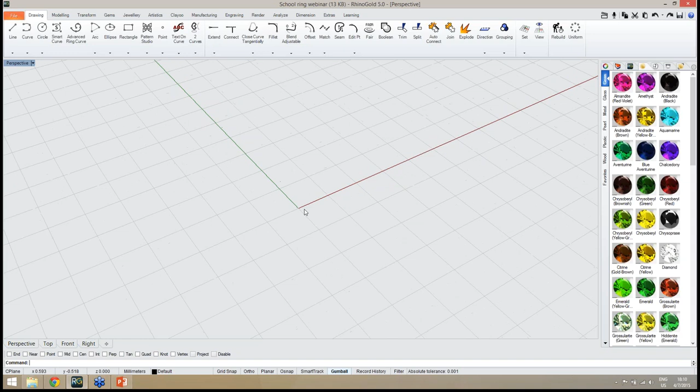The first step, as always, I recommend to start with either the ring size or the central gem. In this case, I'm going to start with the central gem. So let's go to the Gems tab, and then with the Gem Studio tool, we can define the main gem. In this case, we will use a Cushion Gem Cut. As you can see, under Gem Studio, we can easily select the gem cut we want to use.

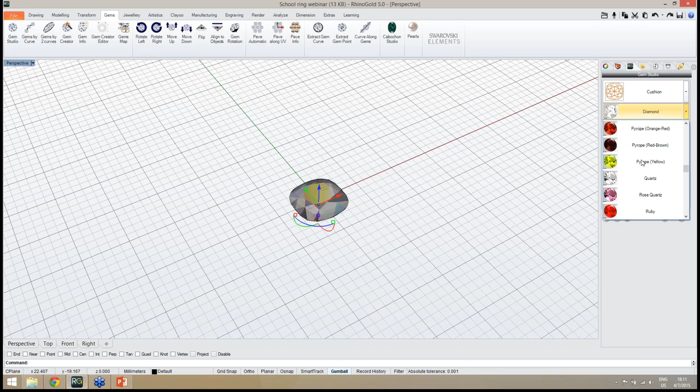And then, of course, we must select the gem, so Cushion. And then we just need to define the size. So let's do it with 6 millimeters. And then the material, of course, in this case, well, I can change for any other material. Let's use Ruby and click OK to add the gem to the document. So the first step, the gem, is done.

Now, the next step, I'm going to define the ring size and the ring parameters. So I'm going to use, under the Jewelry tab, the Signet-Ring Tool. The idea is to define with the signet ring the shape we want to create, and of course the ring size, in this case, let's use size number 18, and then adjust all the parameters.

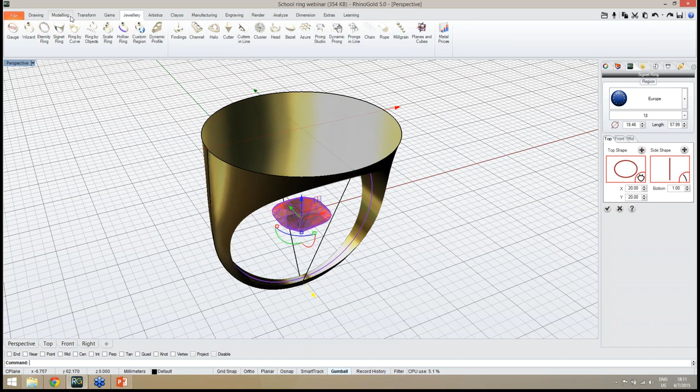So instead of using a round shape in the top, I want to use a shape like the Cushion Gem Cut. So what I'm going to do is to get, under the Gems tab, the Extract Gem Curve tool. This tool will allow me to extract the profile curve from this gem. Now I want to use this curve as my top shape for the signet ring, so I just click Add and define the name. I can define Cushion Curve.

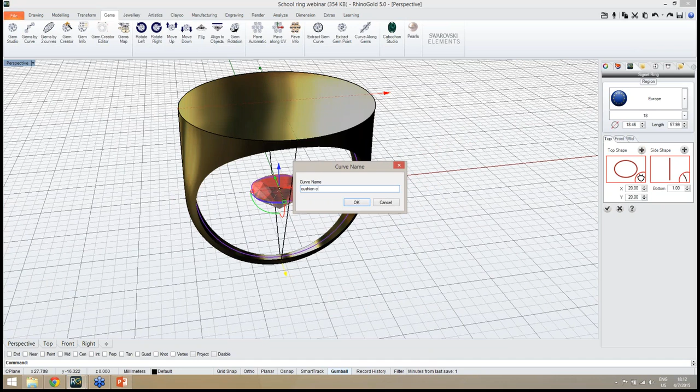And as you can see, automatically it will adapt the ring size, so in this case the ring top shape, to the curve we defined. So the next step now is to define all the parameters.

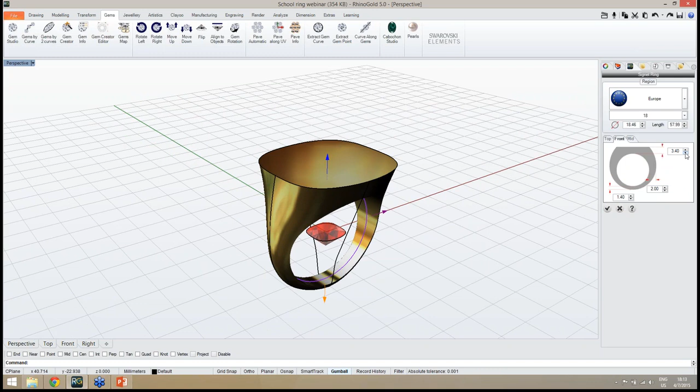So I'm going to define the bottom with 8 millimeters. I'm going to define the front total with 4 millimeters. I'm using the parameters in the side panel. I can also define the side with 2 millimeters, and of course the bottom, let's use 1.4, looks good. In the top, maybe a little bit less, 3 millimeters, I believe it's enough, 3.2.

And of course, in the top view, we have the option to define the side shape. So instead of the straight line, I'm going to use profile number 5. As you can see, it will adjust the ring shape with this side curve. So this is the idea, we have the ring defined. I just need to click OK to add the ring to the document. So this will be the base I'm going to use to define my ring.

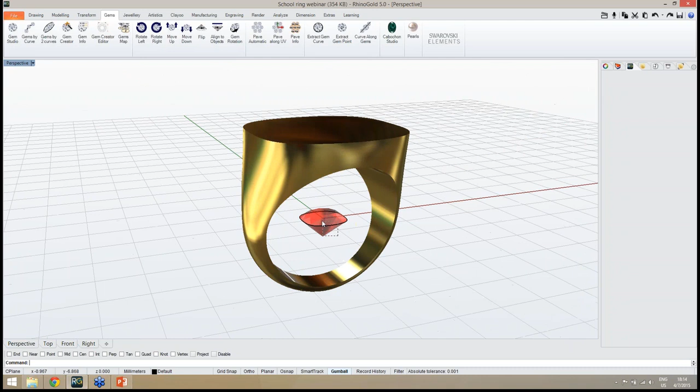And now the next step, I'm going to move the gem to the top of the ring. So I select the gem and the curve, and in the front view, using the gumball, I'm going to use the grid snap option. So I just use the gumball to move the gem exactly where I need, defined exactly in here.

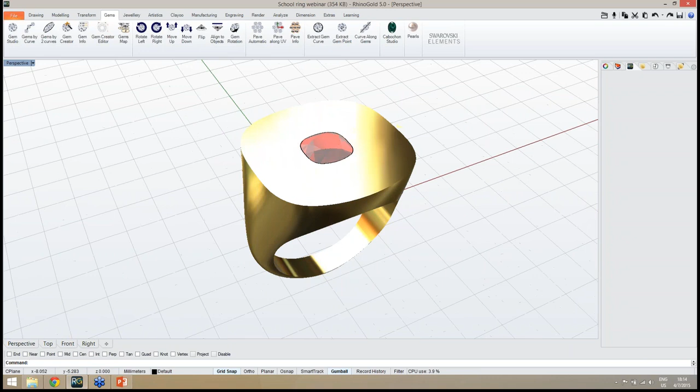And now back to the perspective. What I'm going to do is first remove the top surface, this flat surface in the top, and change it for a different shape. So under the modeling tab, under the cap submenu, we have the Extract Surface tool. The idea is we select this tool, extract surface.

We need to select the surface to extract and make sure you are using copy no, so I don't want to copy, I want to really extract this one. So I select the surface, I press enter, and now I can delete directly with the keyboard to delete my surface. As you can see, now my ring surface is open. What I need now is to create another surface.

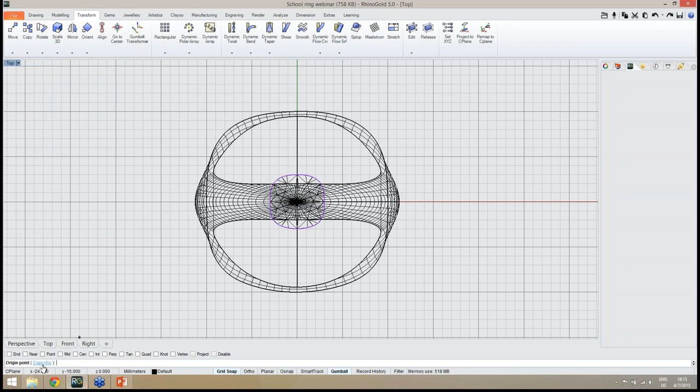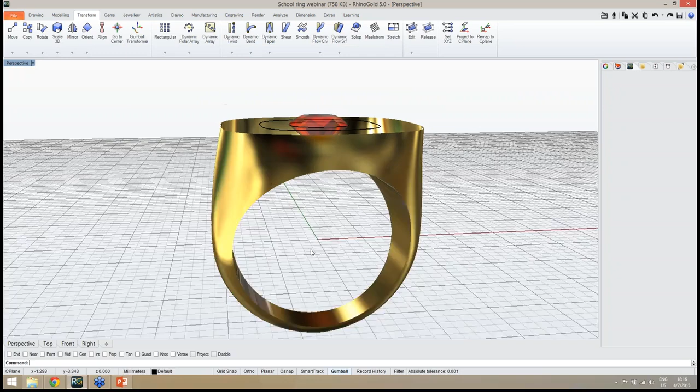But before, in the top view, I'm going to select this curve and create a curve between these two. The idea is using the Transform tool, under the Transform tab, I'm going to use Scale 2D, so scale to direction, and make sure in the command line we are using copy option yes. So I start from the center and create a curve, probably without grid snap, just in the middle, so it will be here. Looks good, enter. So now in the perspective we have another curve, and I'm going to move this curve.

So let's go to the front view. I'm going to move this curve to the same height as the top gem surface. So now the idea, I can see in the perspective, if I need to scale a little bit, I can scale easily with the gumball, just a small detail. And now I want to create a surface using this curve.

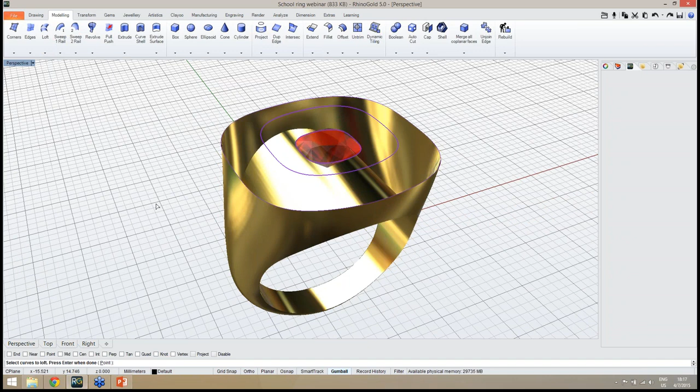So the idea is under the modeling tab with the Loft Surface tool, I select the curves to loft. The first one is the edge, the second one is this curve, and the third one is the curve around the gem. So I select these three curves, I press enter, and as you can see I have here the direction of the curves and the starting point. I press enter again, and I have this surface.

Remember, by default it can be normal, so it will be a round surface, but we can easily define straight sections and preview. So this is the shape I'm looking for. After this I click OK to add this surface, and next I'm going to hide the gem.

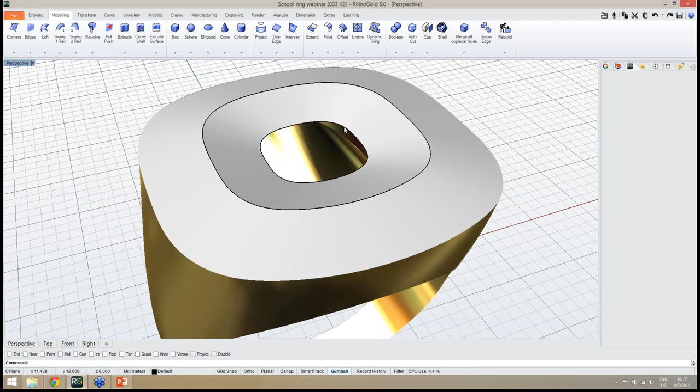To show what I'm going to do: select the gem, hide it - remember press shift to show this viewport toolbar. Now I want to use this curve to create a planar surface. Under the edge submenu we have planar surface, and with the curve selected I create my surface.

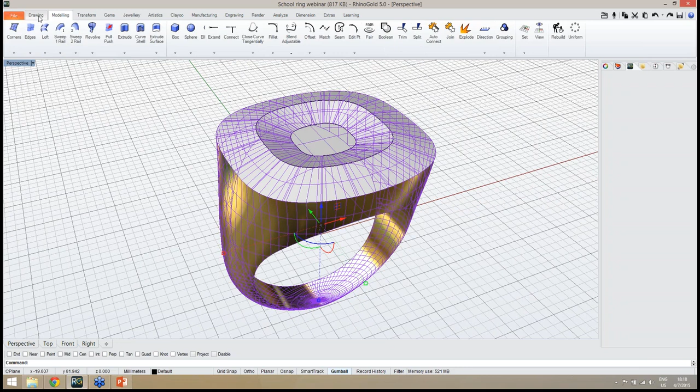So what I need now is to join all this surface in a single closed solid. I select this one, this one, this one, and under the drawing tab with the join tool join all these in a closed poly surface. As you can see in the side panel, we have this as a closed solid.

So the next step, I will start defining in the right view the model, in this case the curves I want to use in this side part of the ring. Let's use the Smart Curve tool under the Drawing tab, and I'm going to use the option Symmetry Vertical. I activate this option in the command line, and also I will say Closed Curve. So now I can define easily the curve I want to use.

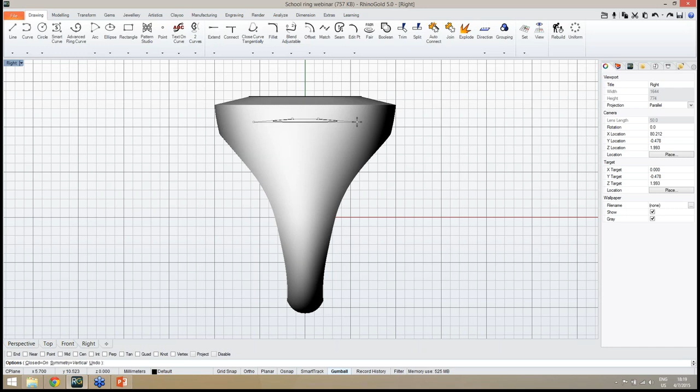So this will be the idea, the shape of the curve. Let me select the curve - as you can see, it's here. I can scale a little bit or adjust if I want, maybe in this direction, and it looks good already.

So I have this curve, and now I want also to put some letters inside this curve. The workflow will be: I'm defining this curve in the C-plane, and then I will project to the surface. So the idea is in the right view to define everything I will need.

Now I will use the text, and I will define first a text. I will define RhinoGold, and let me undo the size. So what I'm going to do is repeat this step: RhinoGold, and the size I will use - let's try 1.8.

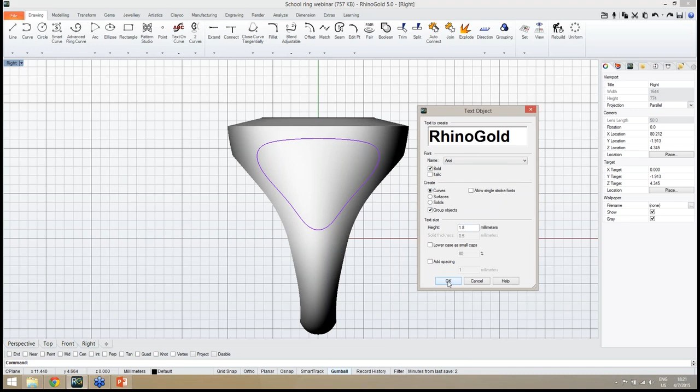Also make sure in these text options we can generate curves, we can generate surfaces, solids. So I'm going to group them, and I will use Arial Bold, 1.8 millimeters. When I click OK, I can define my text curves in here.

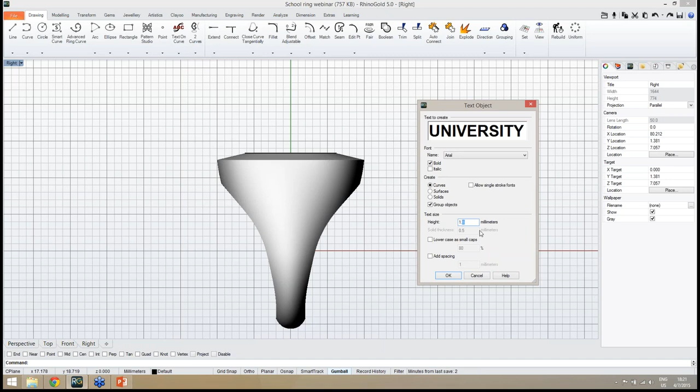Okay, and now the next one, I'm going to define another text. So now I will define university. Of course, you can customize this exactly as you need - this is just a sample of the workflow we recommend. You can use your own letters, so this is just to make sure it's possible to do anything.

So I'm going to place the letters under RhinoGold. Remember, any question, use the chat.

And finally, the last one, the text, I will define 3D. So in here, maybe 3 millimeters. Let's try - looks good. So I will place this in this part.

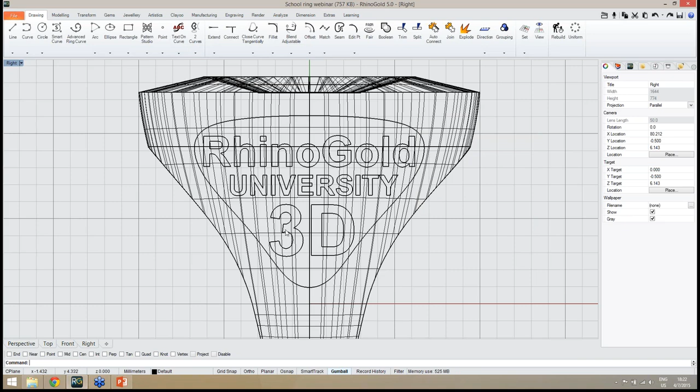Okay, perfect. So I have the side curves I want to use - these are the curves. And now I just need to project these curves to this surface.

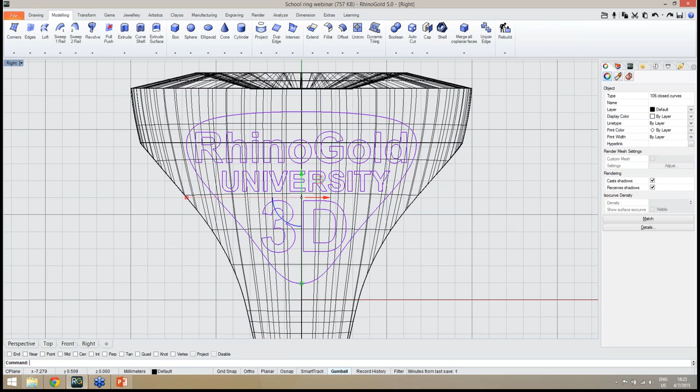So what I'm going to do is make sure I'm in the right view. Now under the modeling tab, we have the project tool. So under the project tool, we just click, and we need to select the curves, and then the surface to project - in this case, this outside surface. I press enter, and now let's take a look at the results.

It will project all the curves to the entire object, as you can see also in this inside surface. So now what I'm going to do is deselect the ones I want to keep, and then I will delete the ones I don't want.

So on this side I can't use it, it's the wrong direction, so I will only keep this side. Control to deselect these curves - remember, we can use Control but dragging a window is faster. And now I deselect the ones I want to keep. So from this side, everything is done.

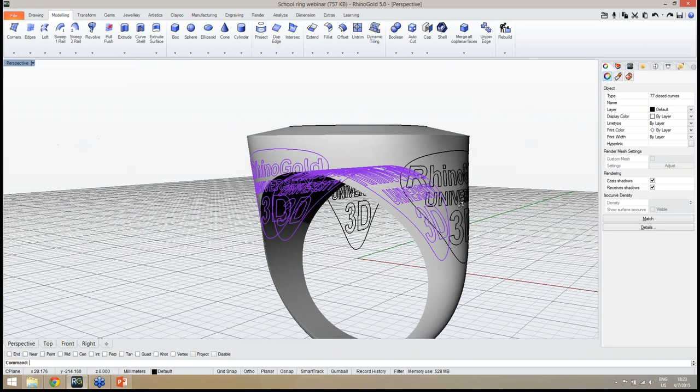And now with delete from the keyboard, I can delete the others I don't need. And I'm going to group these ones and change to a different layer. So I will call this layer curves, and I will change object layer - right click and choose the option change object layer. Then I just need to turn off this layer, and it will be hidden.

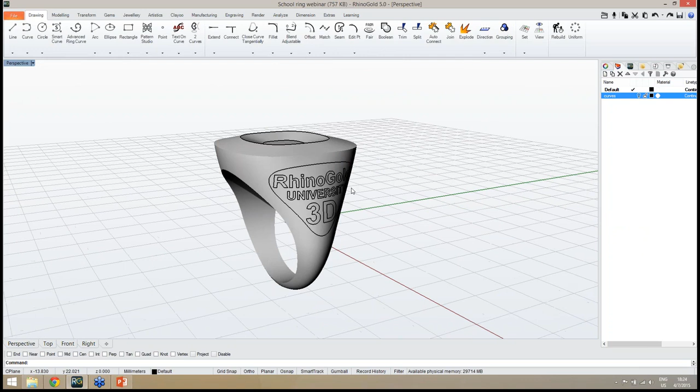So now I have these curves. Let me group them to make it easier for selection. I group these curves, and the next step I'm going to create - in this case what I'm going to explain, the process before, to understand the next step.

I'm going to create a surface from all these curves to then generate a solid from this surface and make the Boolean operation. So to make sure I'm using exactly the same surface, I'm going to the Modeling tab, and once again I'm going to use the tool Extract Surface.

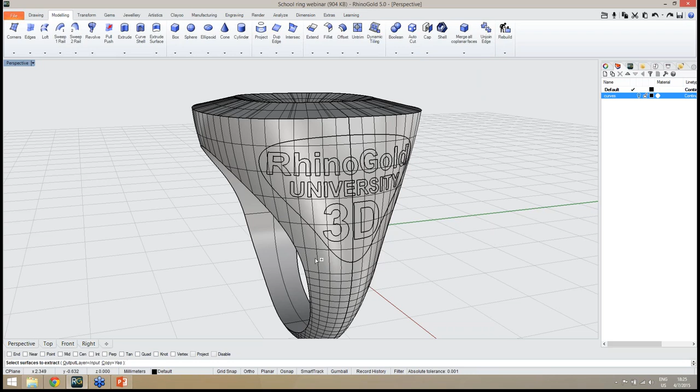Under the Cap submenu we have the Extract Surface tool, and here I will define the option under the command line, Copy Yes. I want to keep the ring exactly as it is, a closed solid, but I want to copy this outside surface. So I copy it, enter, and now I can select the ring and hide it. So I just have my curves and my surface.

Now the idea is to cut this surface using this curve. So under the Drawing tab, with the Trim tool, I first need to select the cutting object, so it will be all these curves except the surface, then I press enter and I need to define the objects to trim.

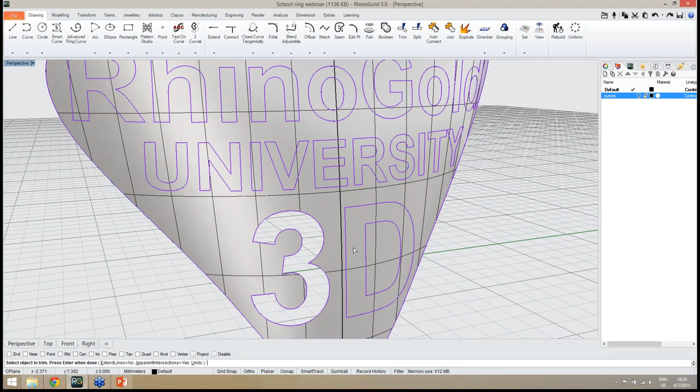So I will start with the outside surface, and then I will cut this part, this part, this part, each letter. Just click inside the part you want to cut. And as you can see, now I cut my letters.

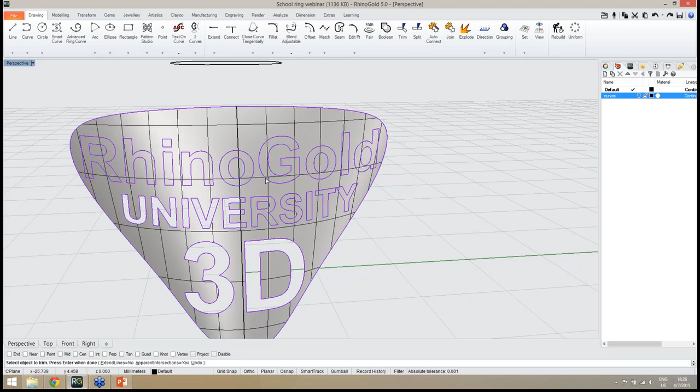This is important. As you can see here, this was the seam of the surface, meaning it was the beginning and the end of the surface. When we trim it, now we have two different surfaces. That's why we need to pay attention to make sure we cut all the parts.

So the same, I cut all the parts, all the letters. I just click inside, it's very easy. And after this, let's just finish almost the H and the R.

As you can see here, I need also to cut this part. So this is the idea. Everything looks good. I press enter in the end, and now I have my surface.

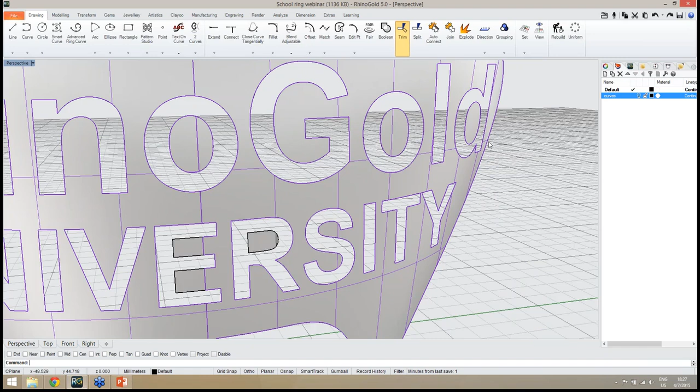Where I'm going to select all of them. As you can see, the inside parts from the letters now are a different surface. I need to select all.

First I will join, and then I will group. Join to make sure this part is joined with this and with this, but then group so each time I need to select, I just select this, don't need to select this part, or the inside the O or the D. So this is the idea, just to make the selection easier.

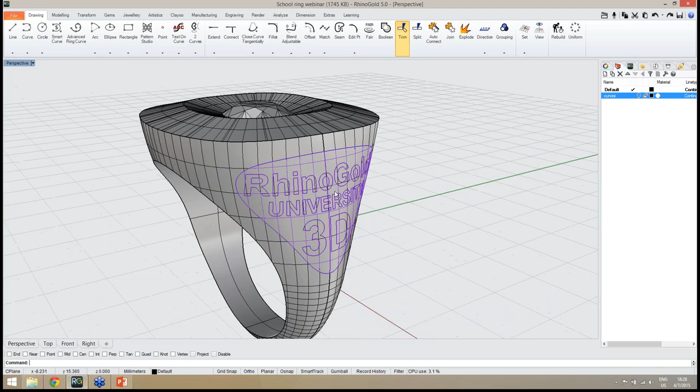Now, the next step, I'm going to show my ring again. I'm going to select the curves, in this case only these ones, and change object layer, so change object layer, and now I have this surface. To create a solid from this surface, and keep exactly the same orientation, the same reference, I'm going to the Modeling tab and use the Offset Surface tool.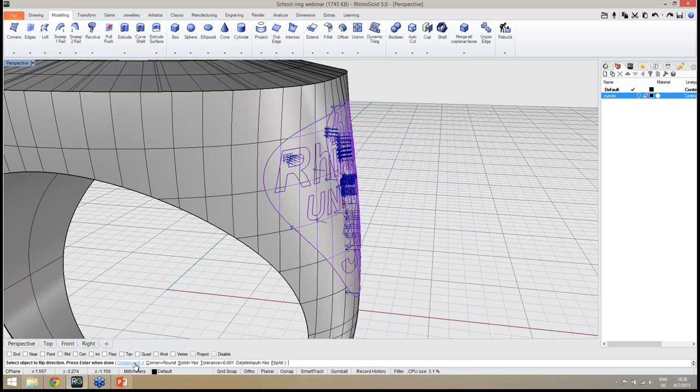So Offset under the Modelling tab, as you can see the direction is flipped. I want inside direction, I want to create a cutting object, so I will flip all and make sure this is what I need. I want to create offset distance with 0.4 millimeters and make sure I'm creating a solid. So solid yes, and press enter.

So now it's generating my solid. As you can see, I will hide this to show you, I will hide the ring. I've created this as a solid, so to be my cutting object. So this is the idea, I have my cutting object.

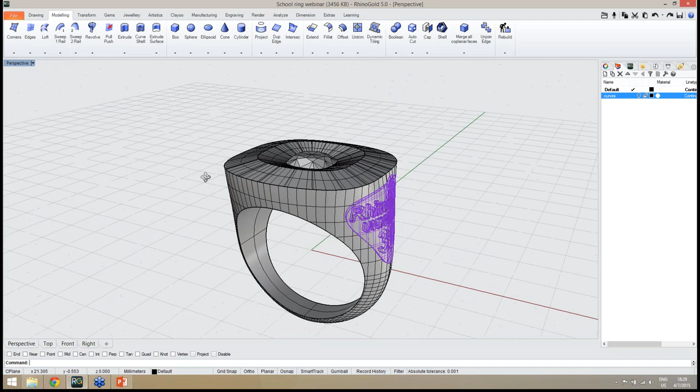What I'm going to do now is make the same object on the other side, but the workflow is the same. In case you want to apply different objects on both parts of the ring, it's exactly the same process. In this case, I'm just going to create the same.

Just one thing, if I create a mirror or a symmetry, it will reverse the direction of the letters. So with letters, it's not recommendable to do that. What I'm going to use is the rotate tool.

So the objects to rotate, it's my cutting object. Copy, I will say in the command line the option copy yes, and then I start rotating from the center, so grid snap on. I start rotating from here to here. So remember, copy option yes, and press enter.

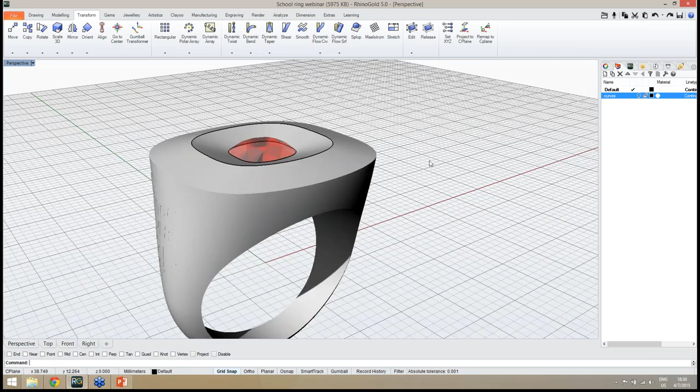So now we have the cutting object on both sides, and now I want to, let me change to render it, I want to hollow my ring. So this is a solid ring, I need to hollow it.

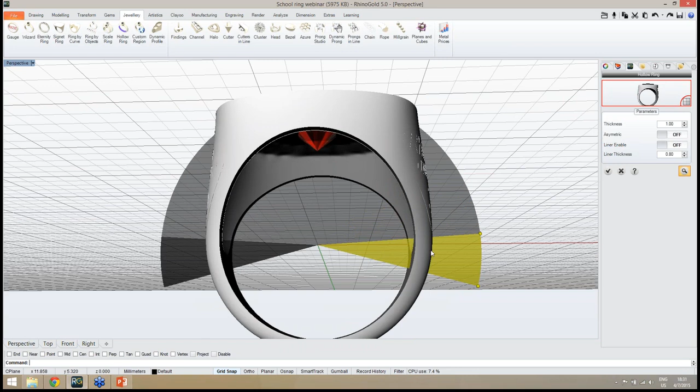So in the Jewellery tab, the hollow ring tool, I just need to select the surface to remove, so it will be the inside surface, press enter, and now I just need to define all the parameters. In this case, this is the main area, this central area, it's the area to hollow, then the transition area, and finally the solid part.

In the side panel, we can define the thickness. In this case, I want to use 1.2 millimeters, and I preview the results. So now we have 1.2 millimeters thickness, the ring is hollow.

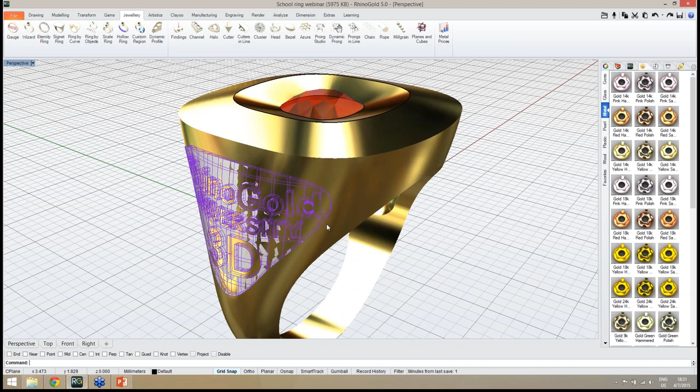I just check in here to add the changes. Let me define a material just to show. Now, as you can see, we have this cutting object sharing the same surface. Usually we call these coplanar surfaces, and as most of you probably know, Rhino has some difficulty with coplanar faces.

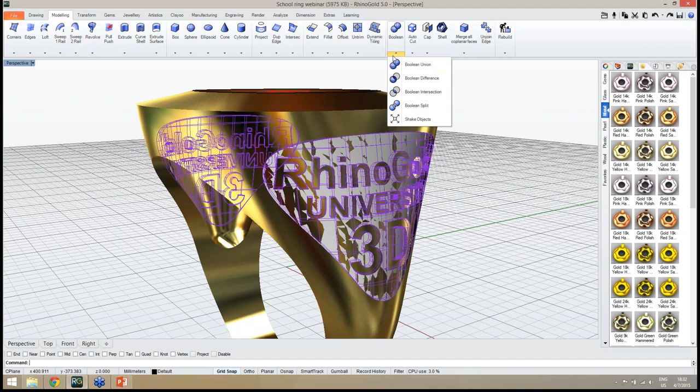So to make Boolean operations, we should avoid this. To avoid it, we can use, for instance, under the Modelling tab, the shake objects tool, or in this case, what I'm going to do is just enable the gumball, and using the gumball, I will scale a little bit, but just really a little bit. With grid snap activated it's not good, so I will undo and disable the grid snap, and now scale just a little bit to make sure it won't be a coplanar face.

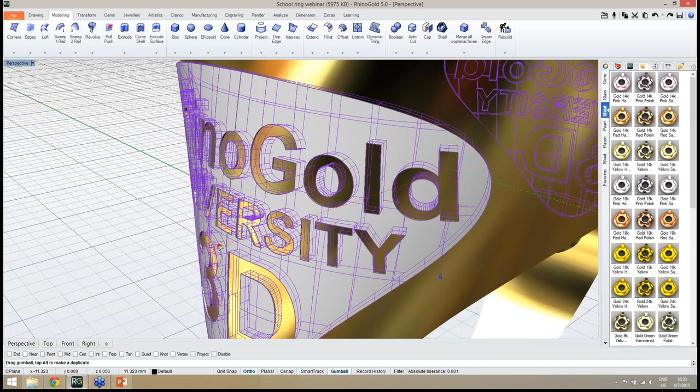So as you can see, now we have this. There is a little bit which can be trouble at the time to make the Boolean, so I will avoid it, just scale a little bit more, and I'm sure I will avoid these coplanar surface problems when making the Boolean.

So I have my cutting object defined, and now I just need to remove it from the ring. Boolean tool, I define Boolean difference, first object to keep, which is the ring, and second object, the objects to remove, in this case, this cutting object. So I just preview.

Let's take a look. So it's calculating. Okay, and as you can see, the Boolean was successfully done.

So now I just need to click OK. And let me change display mode to see better. We have the recessed area. We just keep the letters. So this is the idea.

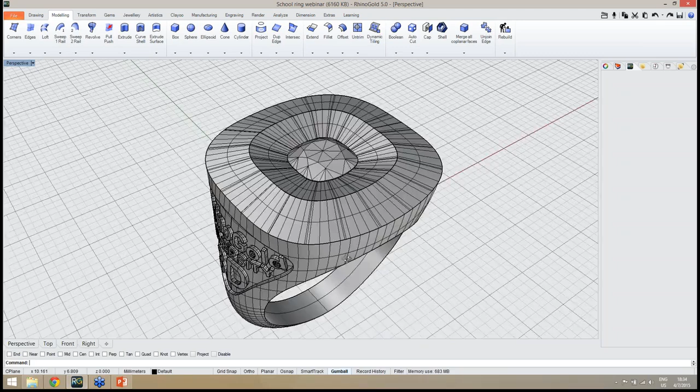So now I still need to create, this is a closed ring in the top. I still need to create the stone seat, the hole for the gem. And to do it, I'm going to use the normal cutter tool.

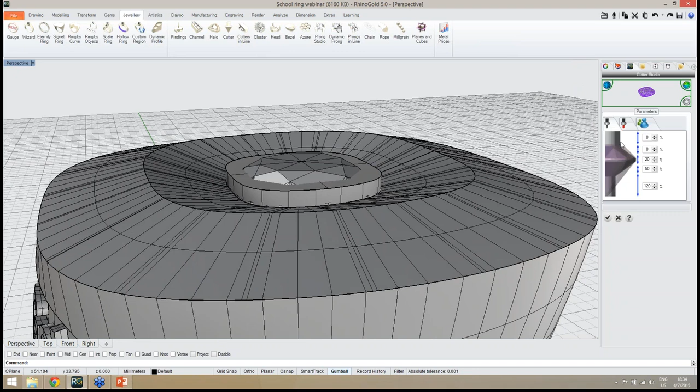So under the Jewelry tab, Cutter Studio tool, I select the gem, and now as you can see I create my cutting object. In this one I just want to make sure, because I'm going to create a bezel, so the idea will be to scale a little bit more, because then I will use the bezel to make the stone setting. So I will scale, total scale, or maybe just in here a little bit more.

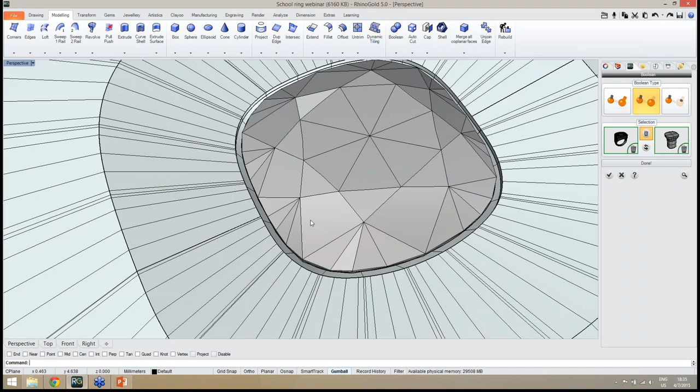And now I'm sure I'm cutting my ring under the gem. So I create my cutting object, and now once again just the modeling tab, Boolean tool, Boolean difference option. I select the object to keep, the ring, and then the object to remove, the cutter. I preview, and as you can see we have successfully removed this part. I just click OK to remove the cutter from the ring.

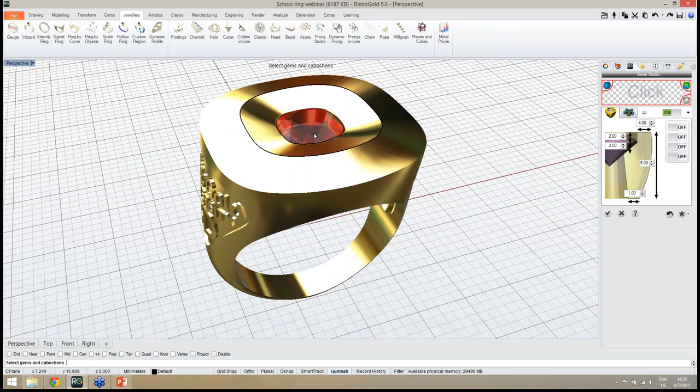So the next step will be to create a bezel to this central gem. So let me change the display mode. Now in this step what I'm going to do is, under the Jewelry tab, with the Bezel Studio tool, I select the gem where I want to apply the bezel. So I select this gem, I press enter, and as you can see I have a default bezel with the default parameters. I will just adjust the parameters exactly as I need.

So in this case I will define 0.5 millimeters in the top thickness, the height I will also reduce a little bit more, and the same in here, total height I will use just enough, because in here I don't need too much. As you can see in this ring I don't need so much, so I just define the height as I need.

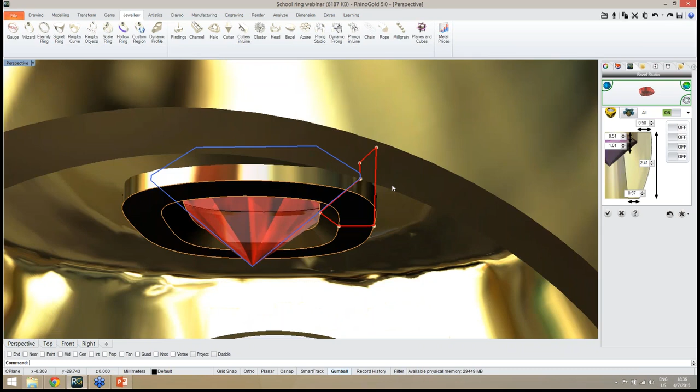I can adjust these point gumballs. Remember, if you use shift from the keyboard it will activate the ortho, and the same in here. So I can adjust easily the shape of the bezel exactly as I need, and probably in here I can reduce a little bit more, and it looks good. So I just click OK, and I add my bezel to the document.

So this is the idea. I have my bezel for the central gem. I can hide the gem just to show you how it is inside, ready to make the stone setting. And now I'm going to create first the Milgrain.

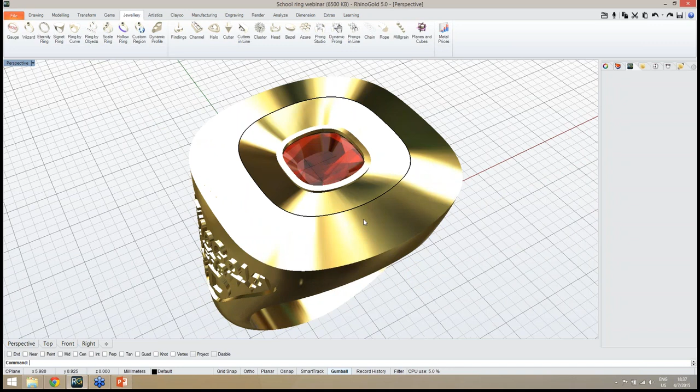I can apply now the Milgrain to make sure I have space, because I want to make also some letters in this top area of the ring. So what I'm going to use now first is the Milgrain tool.

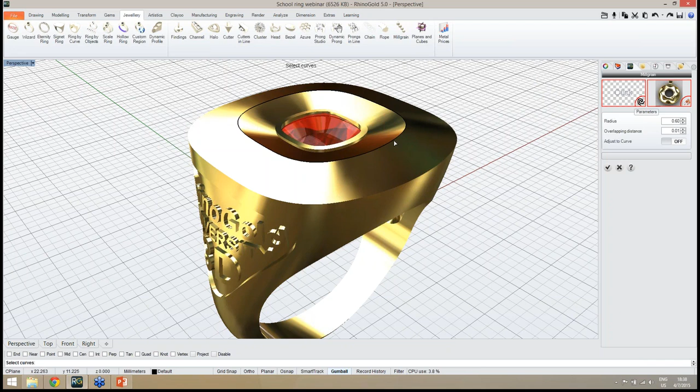So under the Jewelry tab with the Milgrain, I need to define the curves I want to apply in the Milgrain. So the first curve is this one, actually can be the curve or the edge, and also this one. So I use these curves, and remember I need to adjust the parameters. In this case, radius from the sphere from the Milgrain and overlapping distance looks good. Just click OK to add the Milgrain to the document.

So it's adding the Milgrain to the document, as you can see.

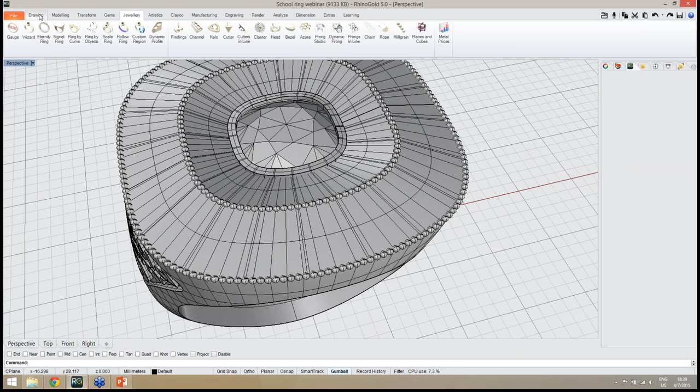And now, to apply the top curves, let me change the display mode just to see what kind of surface we have in here. So I want to create a curve to make sure I will apply the letters on the curve, the text on the curve. So let's go to the Drawing tab, and before that I'm going to the Modeling tab just to get the curves from the surface.

As you probably remember from other webinar sessions, we will use the Extract IsoCurves tool. I need to define, as we can see in the command line, the surface for isocurve extraction. So let's start with this one.

As you can see, the direction of the curve is not the direction I want to use, so I want to use the other direction. I just need to define the toggle. So the idea is to change the direction. Also, we can use, instead of V, use U. So this is just changing the direction.

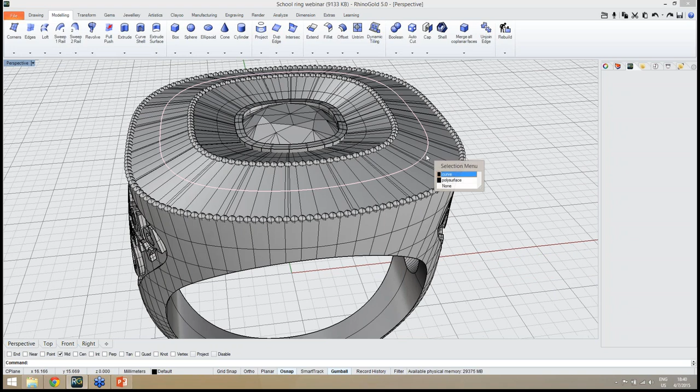And now to make sure I will use it from the midpoint, I will enable the mid in the OSNAP. So in here, as you can see in the mid, I'm sure I'm using the midpoint. So now we have this curve, and I will do exactly the same for this inside surface.

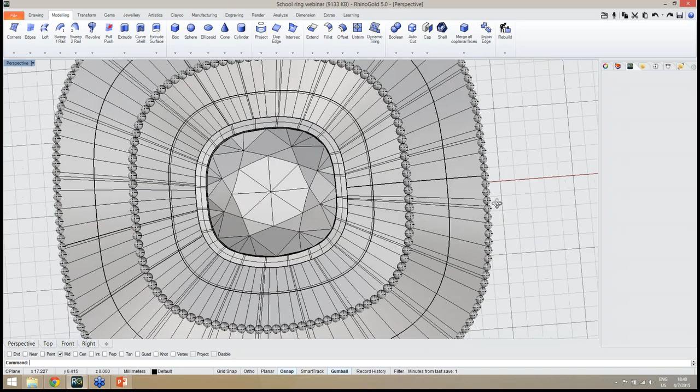So once again, what I'm going to do is duplicate edge submenu, extract isocurves. I define the surface, and now I will use once again the midpoint. As you can see, I have two curves extracted, and the next step...

Let me change the display mode. I will place some letters along this curve. So the idea is Drawing tab, Text on Curve tool, and first we need to define the curve. So let's start with this outside curve.

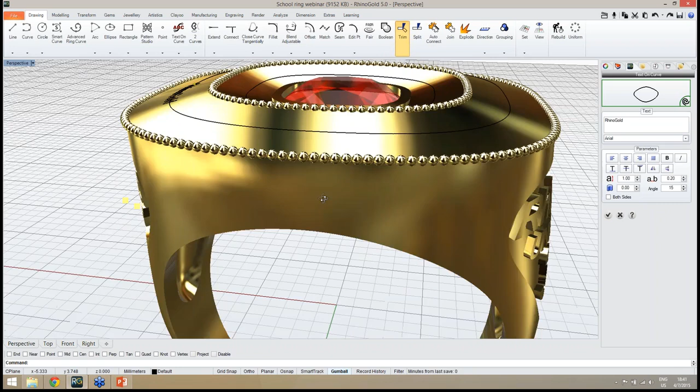We can see here the text. We cannot see it because it's flat, and the surface has a small inclination. So first, to make sure, I will just define the angle as 15 degrees. So now we can see the letters exactly as we need.

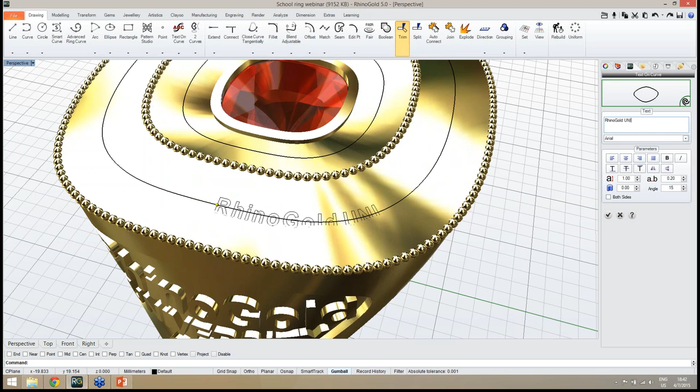So after this, I'm going to define the text I want to use. So I want to use RhinoGold. I can make it bold, so I select and make it bold. Also RhinoGold University, and now I need to define the text size, all these parameters.

So let's start with this parameter, RhinoGold. As you can see, now the text is adapting to the curve, so it's following the curve. Let's see, text size. Let's use 3.8, 4 millimeters. I believe it's more than enough. Maybe 3.8, it's more than enough.

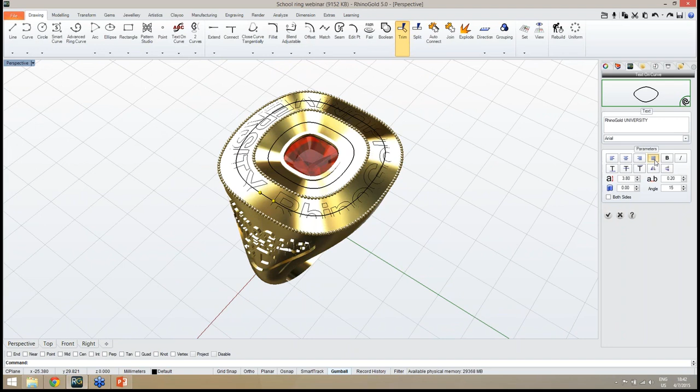And now I will adjust my space and everything. So first, this will be the start point, and this will be the end point from the text. To make sure I'm using it as I want, I'm going to use this justification option, which allows us to adapt all the text to divide all the letters along the curve.

So in this case, I also want to use one option, before I'm going to use this: hyphen 2015. Let me just change the keyboard. Sorry. Okay, and now I will place hyphen...

And hyphen again. So the idea now, I will just need to adjust this distance. Looks good. Maybe reduce a little bit the letters, and also in here even, and maybe one space more, one space more. I still believe we have bigger letters than we need.

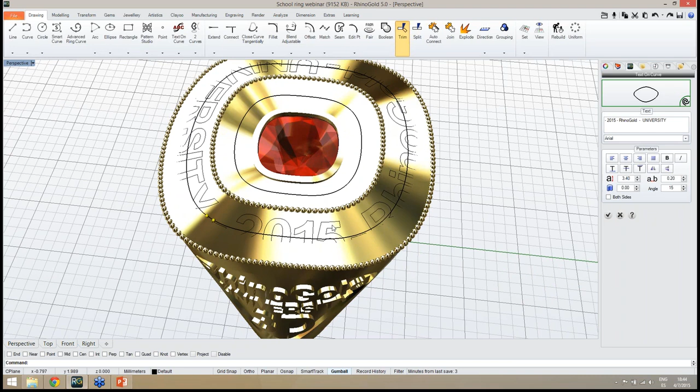Okay, I believe now it's better. I can place like this. Of course, we can adjust using all the resources we have. Go to the top view to make sure it's exactly as you need.

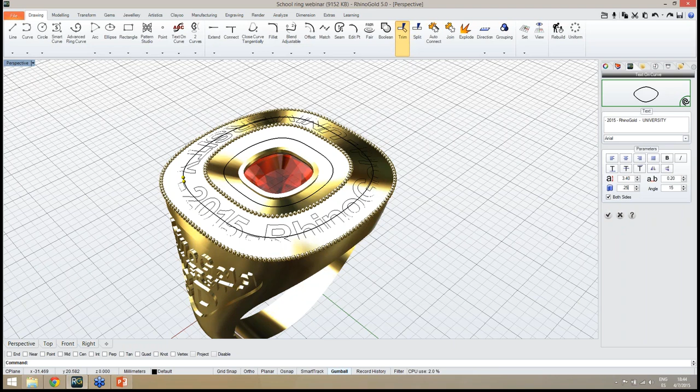So now the next step, I'm going to define, I want to create not only curves but solids to make my letters. So I'm going to use the option both sides and the extrusion distance. I'm going to define 0.2 millimeters, or 0.25, enter. And remember, it will be 0.25 for each side.

So now, as you can see, I have my letters, everything exactly as I define it. So if I move, it will start calculating again, but this is the result I'm looking for. And I just click OK to add these letters to the document. So as you can see, this is really, really easy.

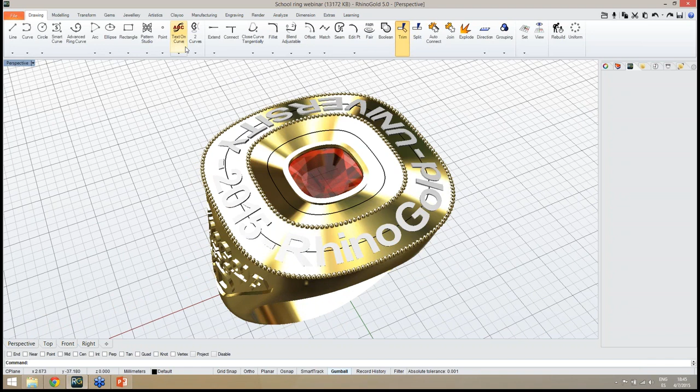And I will follow exactly the same process, the same workflow to add to the inside curve. So once again, text on curve. I define the curve as this one. No, in this case, none of these. I zoom in to make sure I select the correct curve.

I adjust the angle as we did before. And now I will define in here exactly the same. So let's use now, for instance, 3D jewelry software.

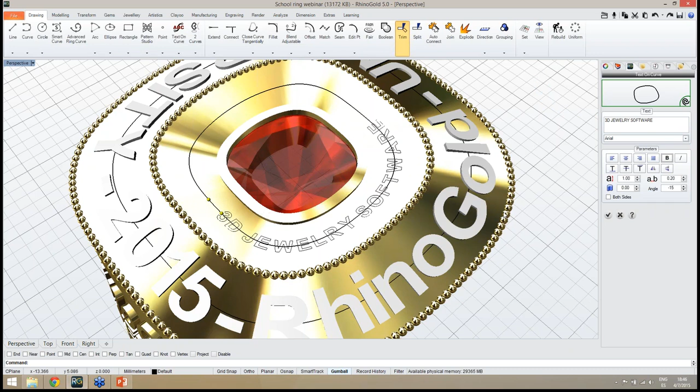Okay, now I will define bold. I will also define justification along this curve, and start defining the size. Let me adjust... okay, I believe it's enough like this. I can adjust even better. Something like this looks good. Remember, I can define more space in here between letters, also in here. So it looks good.

And now the last parameter I need to adjust is the extrusion. So now I'm going to define it.

Pedro? Yes, let me know, Xavi. What do you think?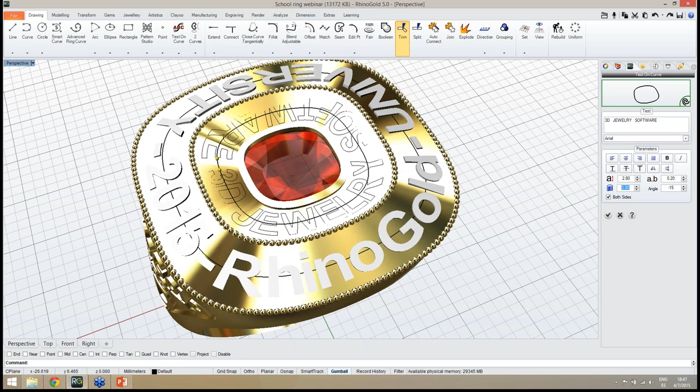No, just one question Klaus asked, and okay, it's possible to do it. We just didn't show it here, but he's asking if it's possible to change the space between the letters. And as you can see on the panel, on the right panel, there is this icon AB.

Yes, so this is the idea. Using this parameter, we define the distance between letters. So we can define 0.2, 0.3, any distance we want. Just remember, if we apply the distance justify, it will divide the number of all the text along the curve automatically, so it won't allow us to define the distance. If we don't use this parameter, we can define any distance we want. So remember, this is the parameter we need to define the distance between letters.

Thank you very much, Pedro. You're welcome, sorry to bother you. No problem, no problem. So, muted. Unmuted. Let's move on.

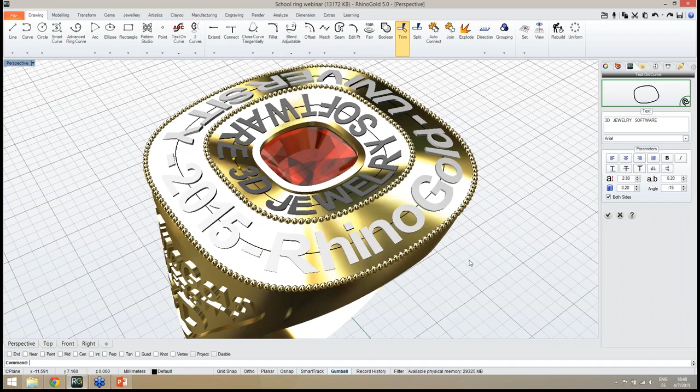We defined everything, so the text along this curve, and click, of course, the extrusion option. I define it 0.2 millimeters for both sides. Just one detail: I define both sides just to make sure I avoid coplanar faces.

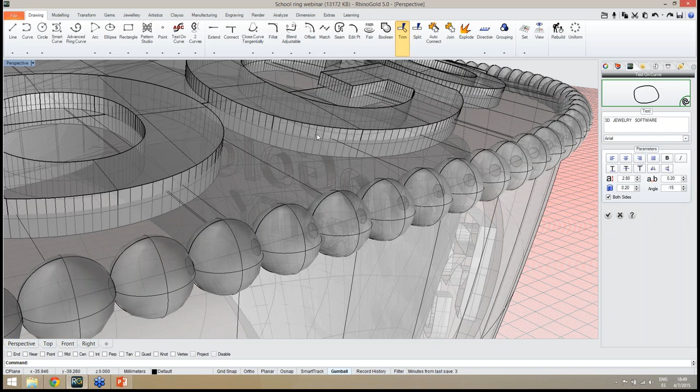So I want to make a Boolean union between these letters. And if I make both sides, let's see here, probably we can see it better, or maybe with ghosted display mode, we see that we have part of the letter inside of the ring. So this is good to make the Boolean operation. That's why I keep both sides. So remember, it's 0.2 to the top and 0.2 to the bottom direction.

So after this, it's done, I just click OK. And as you can see, let me change the display mode. We have the letters applied along these curves. Let me middle mouse button and select curves. So I will select all these curves and change to the layer curves, change object layer. And now everything is defined.

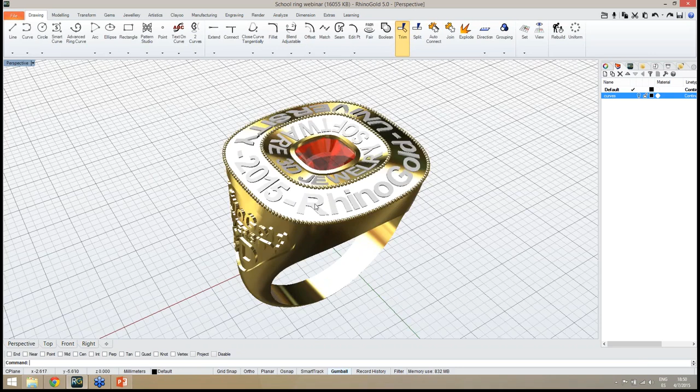So what I need to do now is make the Boolean operations. As we have done before, Boolean option, we define Boolean union. In this case, I need to select all the objects I want to make the Boolean operation with. I select the ring and all the letters. I preview, so it's calculating the results. Okay, as you can see, done. We have made the Boolean, so this is a single part.

Also, we can do it with the bezel. Once again, Boolean, preview. So this is the idea.

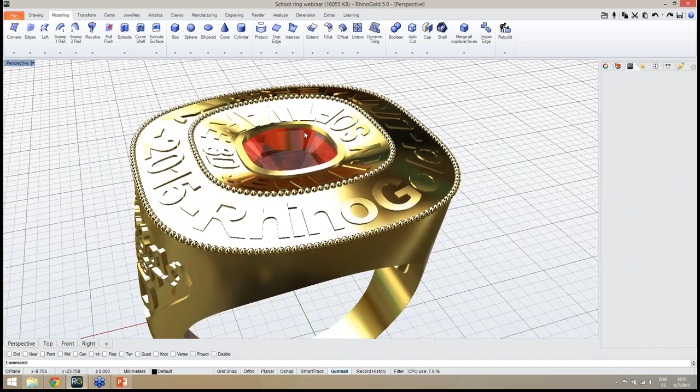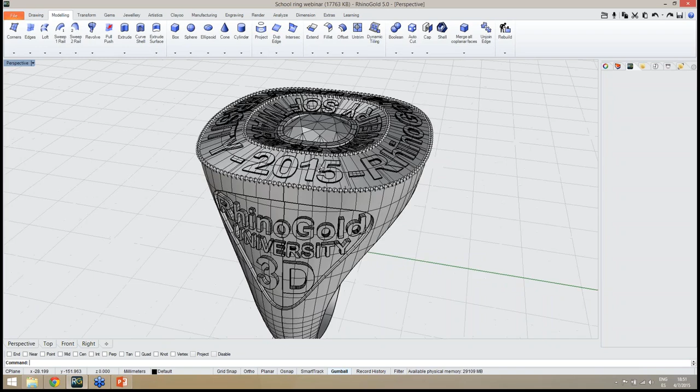I would say that this is just to show the workflow. Of course, we're projecting here our own text. It could be anything, it could be also RhinoEmboss relief, for instance. We can do anything. So in the side part of the ring, also the same workflow if we want to project something in the side or in the front view. So this is just to show the workflow, what is possible to do, and I believe this is a good exercise.

Now, to make the render, for instance, I will make one detail. If I want in the render to look like this bottom surface, this recessed area, has a different finish, of course when we go to printing and casting, this will all be the same object. But to represent different types of finishing process, we can easily, under the modeling tab, extract this surface just for render.

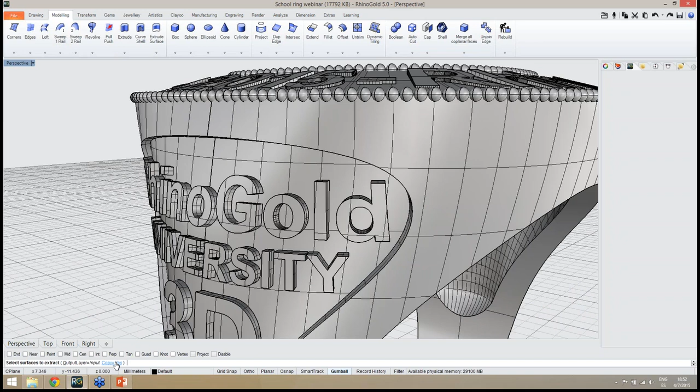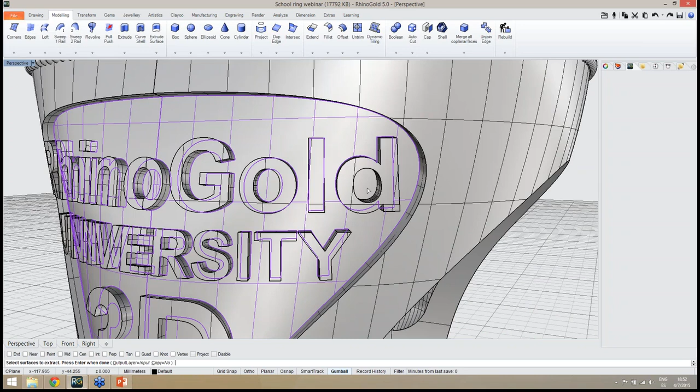So I just extract, copy... I would say no, so I will extract this part, also this part, just to apply a different material and make the render better. So I can apply different materials. So this one, I extract all these surfaces. I will do also in here. I believe I don't miss any, I hope not, but in case we can repeat this operation. I will do the same to the other side.

Select the surfaces, also this one and this one, and in here the same, and in here the same. So I select all, press enter, and once again I join the ones I can and group all of them to make selection easier.

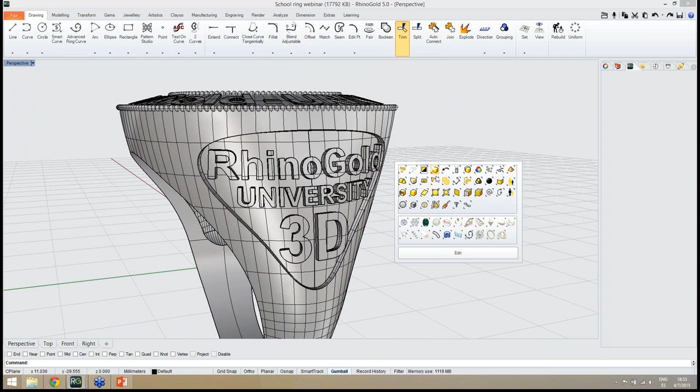So now I can apply. I can select all the objects, and then I will remove from the selection the surface, both, and the gem. So I will apply the material to all this selection.

To make the render, let's go to the Render tab, Render Studio icon, to open the Render Studio in the side panel. Now I'm going to start with the metal. Let's use metal sandblast. I'm going to use yellow gold. Let's change the display mode to render just to make sure everything, the material, is the one we defined.

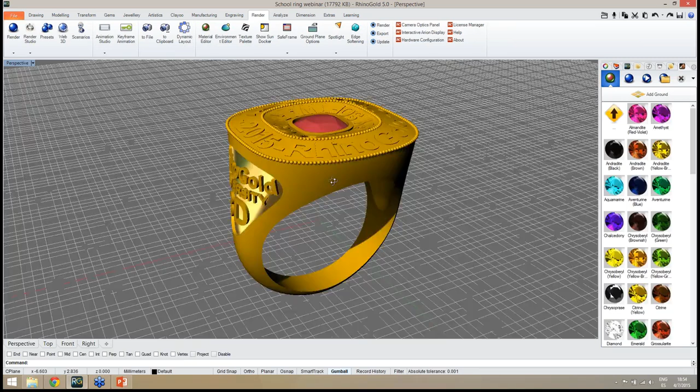For the gem, I can apply, for instance, let's keep the ruby, so ruby gem. Remember, when we are on the Render Studio side panel, we are applying Arion materials. These materials are good for rendering. We cannot get the weight using this material.

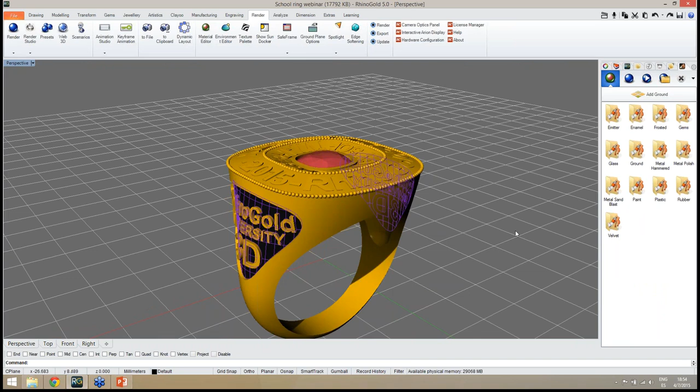This is just for rendering. And this part, for instance, if I want to make it dark it could be other metal, but let me use, for instance, black plastic just to show a different option we have for the render. So I apply all the materials exactly as I need. Also remember I can add the ground in here easily, we have the ground folder, and we can easily drag and drop. Let's use the lead material, and now I will define the render.

As always, render resolution, define the position. Looks good, and now I just click on render. Let's see the results.

So it's calculating. As you can see, in the beginning we have the render with too much noise, but it's cleaning. Each pass, it's cleaning more and more, and in the end we will have a high quality image.

So I apply also this sandblast gold. We could play a little bit with the materials, but it looks good. Let me wait just a little bit more to see the results a little bit better. But this is the idea.